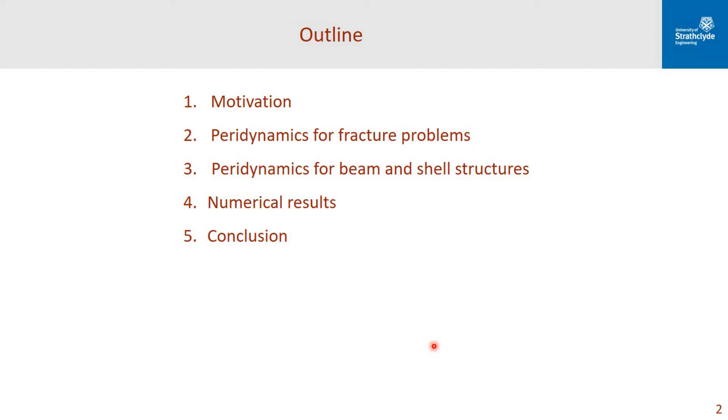Here is the outline of my talk. First, we will see what is the motivation. Second, I would like to introduce quickly peridynamic theories and why it is suitable for fracture problems. Next, I would like to introduce peridynamics formulations for beam and shell structures. After that, we will see some numerical examples, and finally our conclusions.

According to a review in 2019, over the past 10 years we have had a total of 1036 lost cases for vessels over 100 GT. That number reduced from 132 in 2009 to 46 in 2018, which means our ship structures have become safer.

Regarding the reasons for ship loss, we can observe that the main reasons come from foundering. However, grounding or hull damage, which are related to structure damage, are also very important.

Now, coming back to this number: if I divide it by 10 years, and by 52 weeks per year, I get 2 cases per week, which means every 3 or 4 days we receive an email informing us of a new case of ship loss or ship damage. That's a very big number, right?

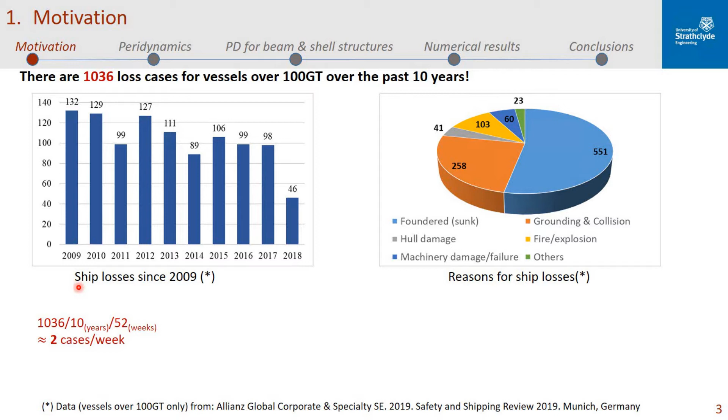Whenever there is damage on a ship structure or offshore structure, we often ask some basic but very critical questions: why did the fracture occur? When and where did the crack start? And how did it propagate?

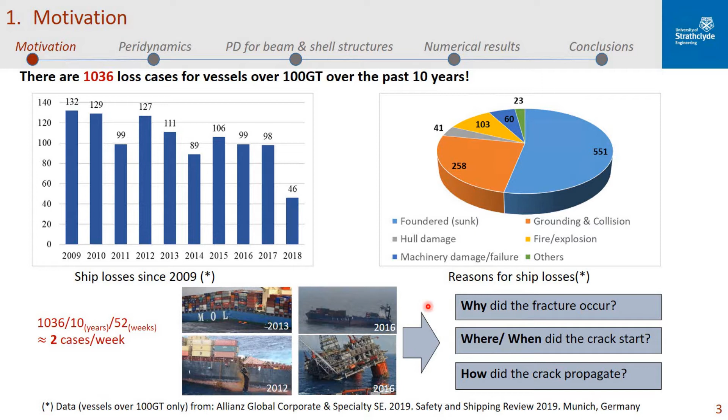Our ambition is to answer all of these questions. We want to understand clearly the behavior of the structure during the damage process. If we can do that, the next step is to propose solutions to prevent or minimize the potential for damage, to avoid catastrophic failures.

So in the next part, we discuss peridynamics theory. Before explaining what peridynamics is, I would like to quickly go back to classical continuum mechanics. The equation of motion for a particle in classical continuum mechanics is usually expressed as a partial differential equation, and we know that partial derivatives require the model to be continuous.

In other words, classical continuum mechanics becomes invalid in the presence of discontinuity. So imagine we are trying to simulate fracture problems, where we want to allow discontinuity in the model — that conflicts with the requirement of partial derivatives. As a result, classical continuum mechanics faces difficulties in predicting fracture problems, especially multiple crack paths or crack branching. In peridynamics, looking at these difficulties, we express the equation of motion in another form, as an integro-differential equation.

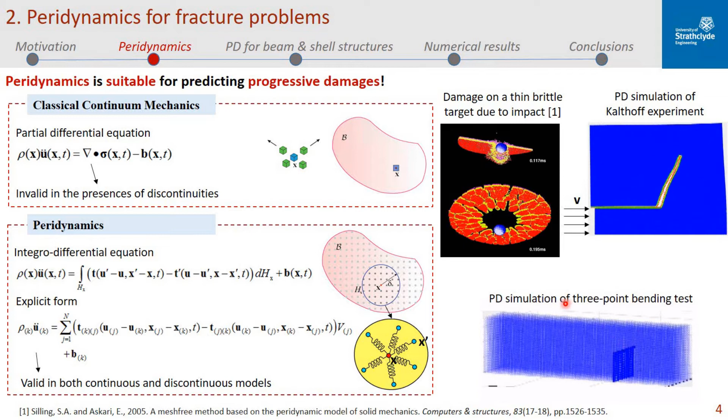I'll give you some examples here. This is a very complex fracture problem of a thin brittle material subjected to impact loading, captured by peridynamics. Here is a PD simulation of a well-known Kalthoff experiment, and here is a PD simulation of a 3-point bending test.

Peridynamics can be applied in many areas, for example to predict damage in composite materials, polycrystalline materials, nuclear materials, or even to simulate ice-structure interaction including damage. There are many more applications in peridynamics, but I cannot show all of them here.

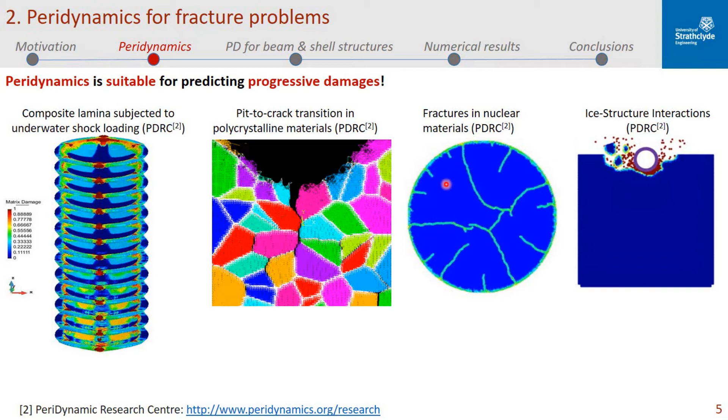The next part is peridynamics for beam and shell structures. We know that our ship and offshore structures have typical properties — they are either thin or slender structures. As a result, if we want to use a 3D solid element to investigate the behavior of these structures, we will face very big problems in terms of computational cost.

Therefore, we need structural idealizations. In classical continuum mechanics, we already have beam and shell theories, and in finite elements we have beam and shell elements. So in peridynamics, we also agree that we need a beam or shell formulation. At the time we started our project, because PD theory was quite new, only developed since 2000, there was no complete PD model available for 3D beam or shell structures, such as a jacket platform or a ship. So we had to develop it ourselves.

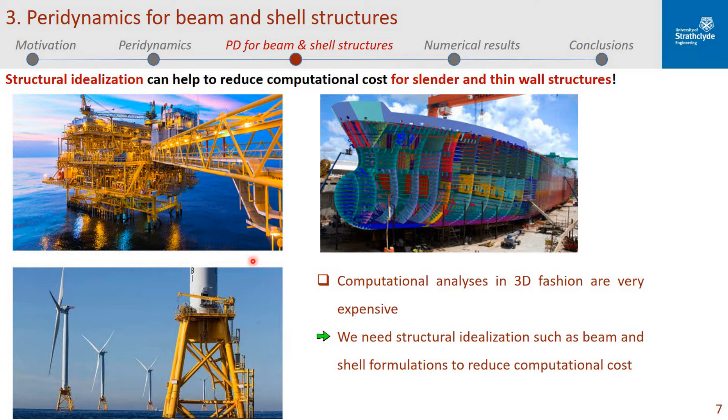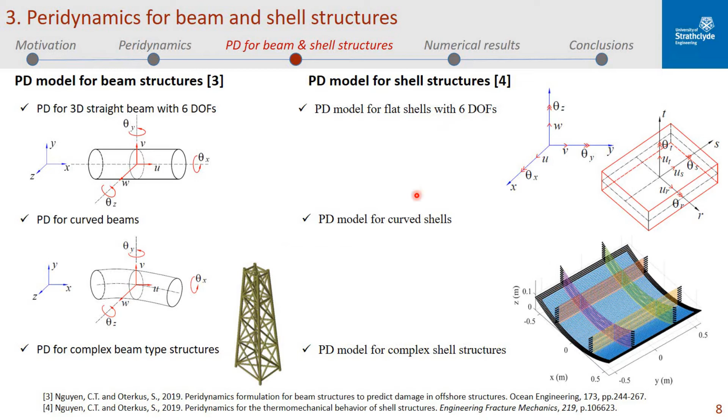To do that, first we develop a PD model for a straight beam with 6 degrees of freedom, and then we extend that model for a curved beam, and finally we further extend that model for complex beam structures such as a jacket platform. For shell structures, we also start with a flat shell with 6 degrees of freedom, and after that we further extend the model for curved shell and complex shell structures.

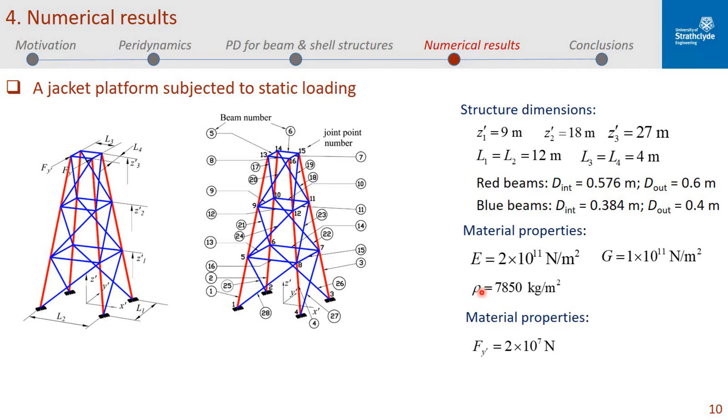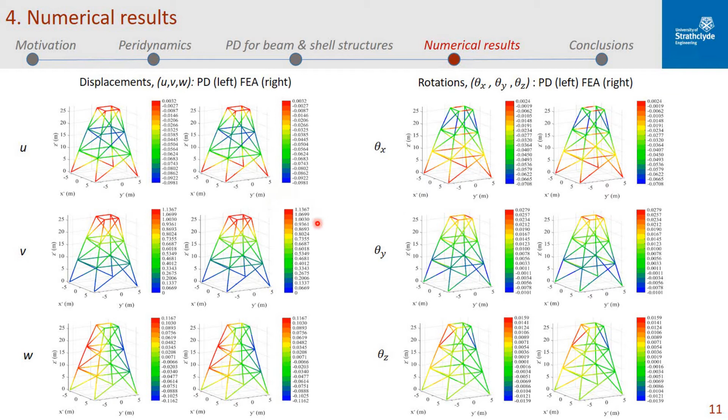In order to validate our PD result, we need to compare with a well-known finite element analysis. So we conduct the same example in finite element and we compare one by one for all 6 degrees of freedom. On the left here is the PD result, and on the right hand here is the finite element result. As you can see, the PD result and finite element results match very well for all degrees of freedom, which shows the accuracy of the PD model.

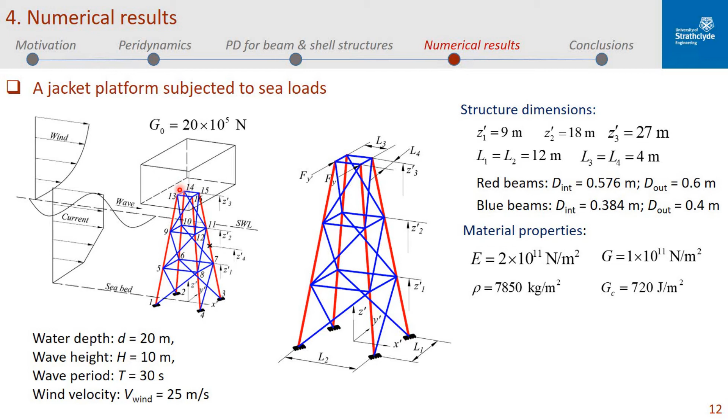In this example, we investigate the same jacket platform, but we assume that the platform has initial damage at this location. Furthermore, we also assume sea working conditions including wave, wind and current. We also introduce a heavy box which can represent the superstructure on top of the jacket platform. The structure dimensions and material properties are shown here.

In order to simulate the behavior of the jacket platform, we need to first calculate the loading conditions - wind, wave and current loads acting on the jacket platform. We validate that calculation with a well-known software called Sesam, and the results match very well.

That joint location is often a very critical location in practice where stress concentration can occur. So from this example, we can conclude that in order to strengthen the jacket platform, we need to strengthen the joint location.

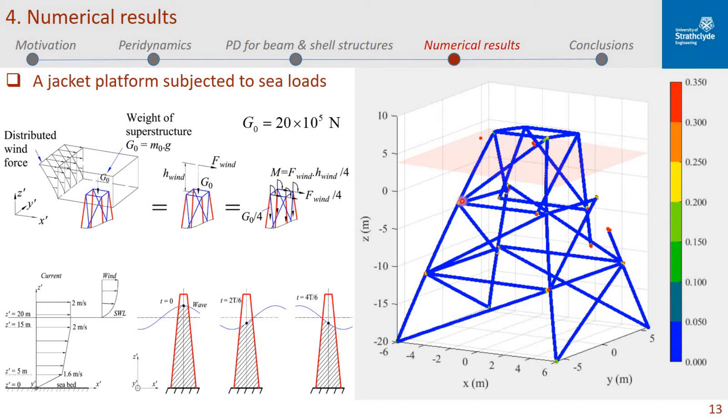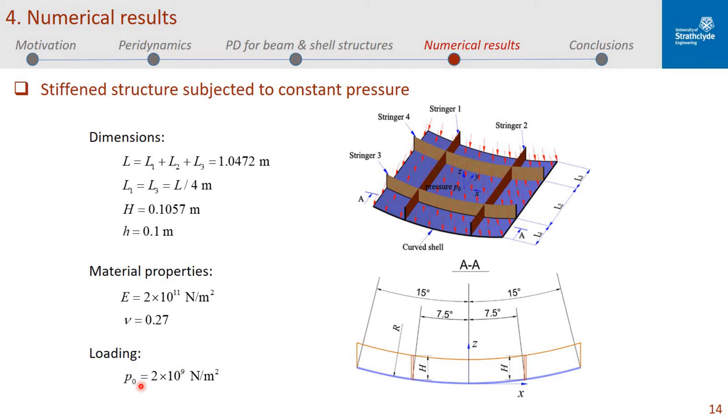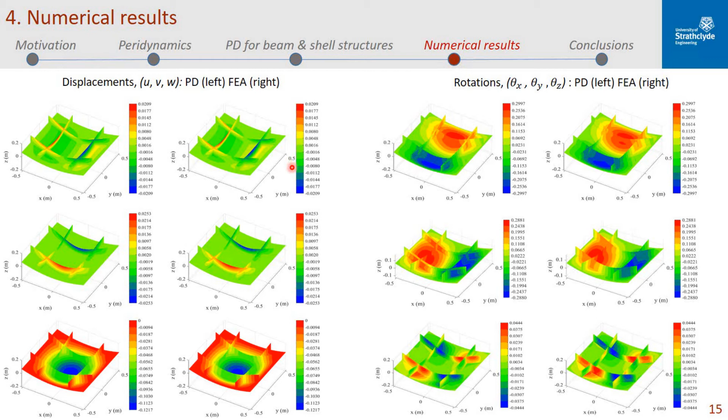Similar to the previous example, we first need to validate our PD model, so we compare the PD result with the finite element result. Shown on the left here is the PD result, and on the right here is the finite element result for all degrees of freedom. As you can see, all the results match very well, which shows the accuracy of the PD model. After verifying the PD model, next we will conduct some crack problems.

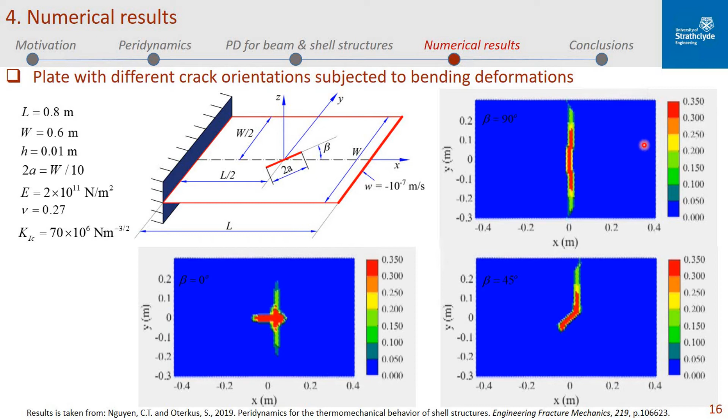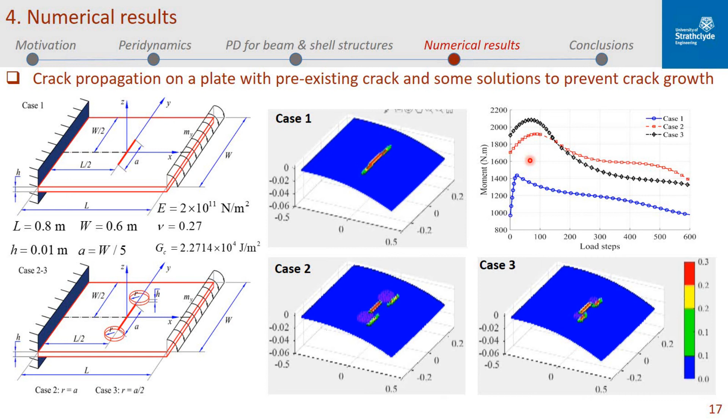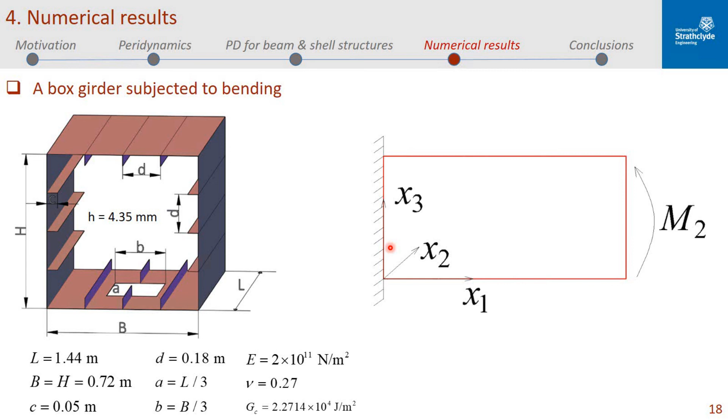So we want to investigate where the damage location is, where it initiates, and how it propagates. Finally, we also want to investigate the residual strength of the box girders.

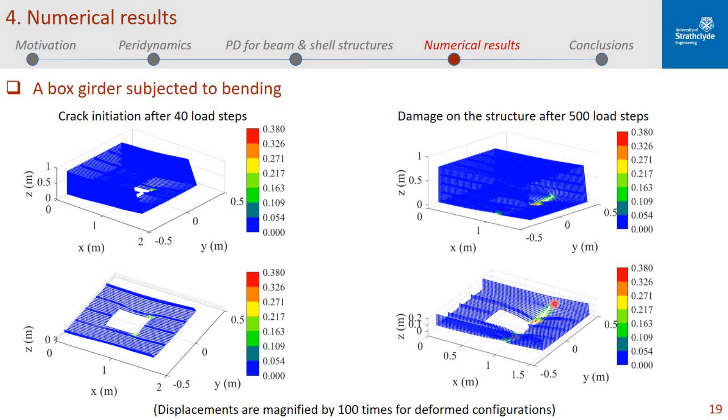As you can see from this figure, after 40 load steps, the crack initiates at the two corners of the cradle, near the right end of the girders where the loading is applied. After 500 load steps, the damage propagates horizontally from the two corners to the sides of the girders.

After 1000 load steps, the crack continues propagating, going beyond from the bottom vertically to the sides of the girders. After that, here is the final damage of the structure.

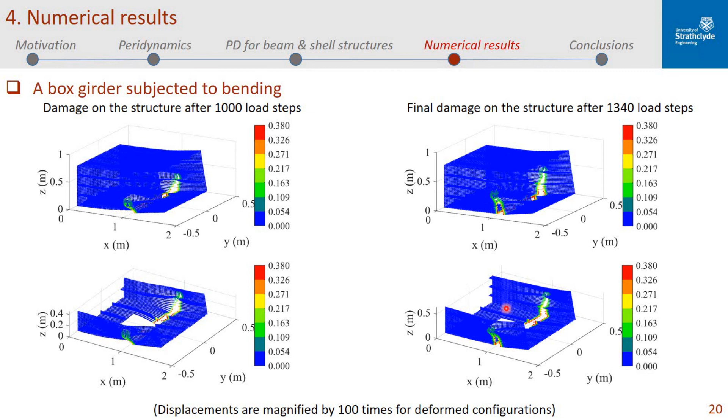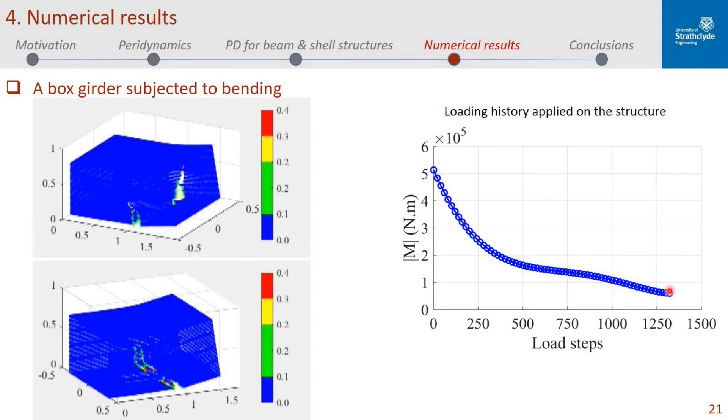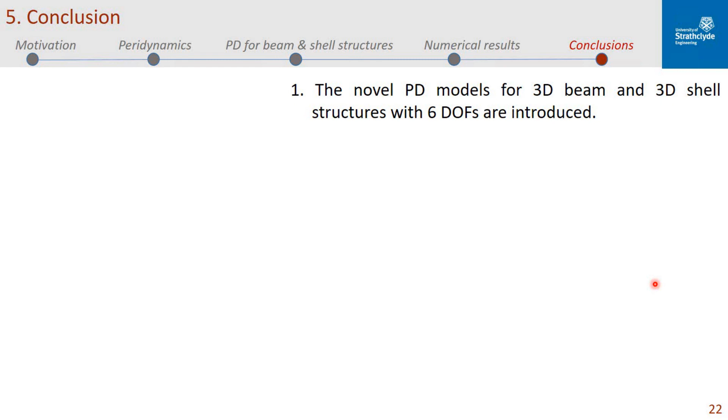So in our conclusions: first, in this study, the PD models for beam and shell structures with 6 degrees of freedom are introduced. Second, a simple method to prevent crack growth in a plate with a pre-existing crack, by putting circular patches at the crack tips, is proposed.

However, for further investigation, other possible methods can also be investigated by using the same PD models.

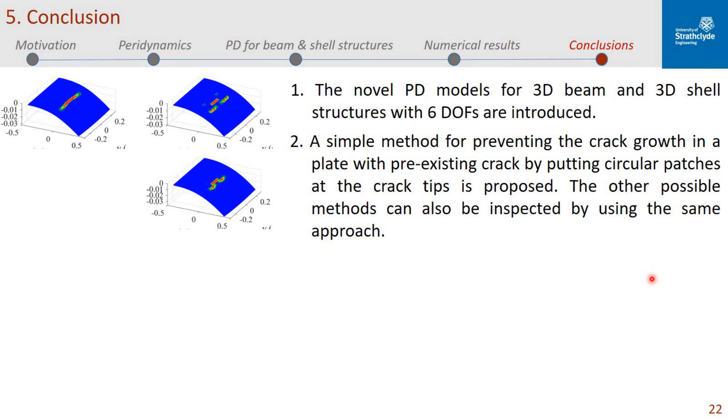And finally, details of damage evolution, including location of damage, crack path, crack opening, and residual strength of a box girder, are investigated by using the PD shell model.

Therefore, further application of this PD model for damage prediction on practical ships and offshore structures can be investigated. Hopefully, unforeseen accidents and catastrophic failures on structures can be avoided.